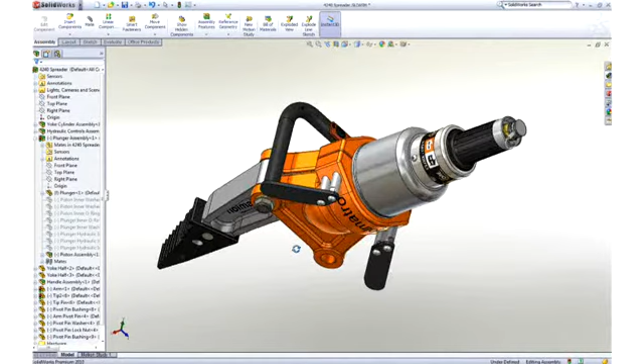This is your first look at SolidWorks. In this brief demonstration, you'll see how Holmatro uses SolidWorks to design best-in-class tools to help rescuers perform their critical life-saving tasks. Looking at this hydraulic spreader, you can see that there's some work to do.

We'll create a part, assemble several parts, and create some drawings. We'll start by designing a new rod end part to connect the piston rod to the spreader arms.

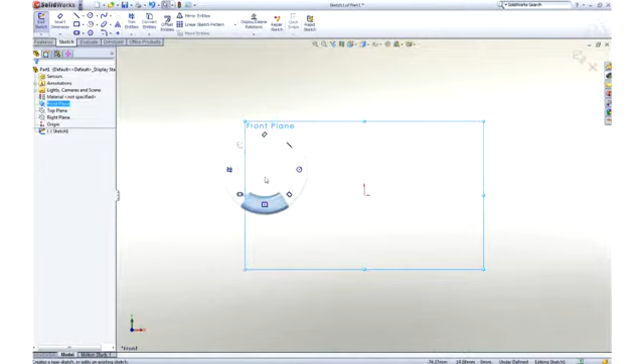The basic building block of a 3D solid model is a sketch, and sketching in SolidWorks is extremely easy and intuitive. Using a mouse gesture, I get access to my most commonly used commands.

Draw a slot, add some dimensions to establish its size, and then drag the center of the slot onto the origin to locate it.

Next, a rectangle is drawn using one of the many sketch tools, and then we will add a couple of circles to hold the link pins.

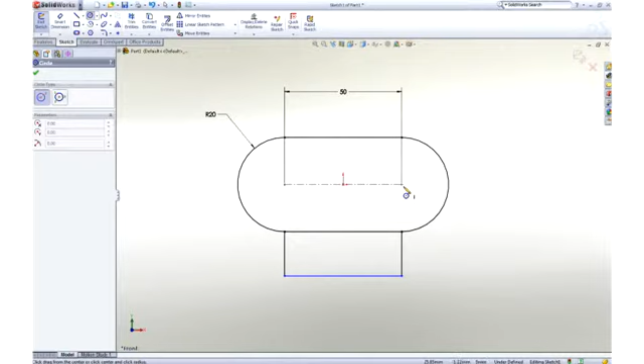The two circles should be the same size, so a quick window selection reveals a pop-up toolbar, and an equal constraint is added to lock their size together.

Notice that as I work, all of the commands and tools are right at my cursor. We call this our heads-up user interface, which is designed to keep your focus on the screen to make you more productive.

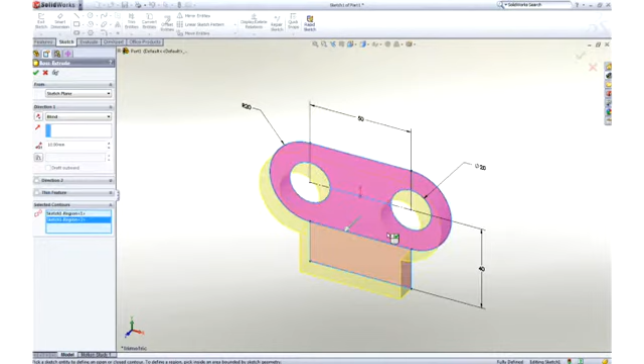Now that this 2D sketch is finished, let's make it 3D by extruding it. It can be extruded in either direction, or in this case we will extrude it 40 millimeters, about the midplane.

To smooth some of the sharp corners, we can add some fillets. Their size can be graphically manipulated on screen, or we can key in a dimension to add some precision.

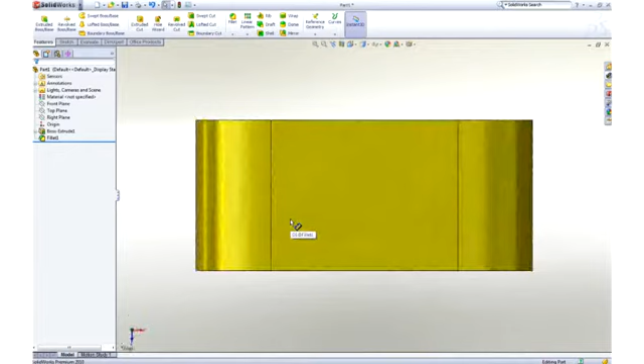Let's add a pocket to the center of the part to accept some links. This time we will use a center point rectangle to capture symmetry while we sketch, and a dimension to control its size.

Using Instant 3D technology, we can add material by dragging the sketch away from the part, or remove material by dragging into the part.

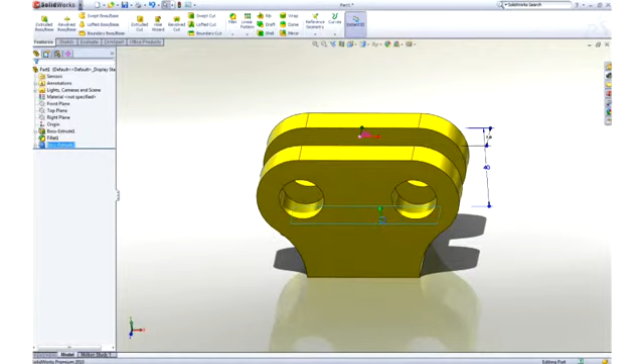The sharp corners at the bottom of the pocket can be rounded by adding another fillet. 2 millimeters would be good.

Finally, we can ease the outside corners with a chamfer. Using the on-screen feature callouts, we can easily control its size while we create it.

Now that you have the hang of it, we will jump ahead a couple features and add a tapped hole at the bottom using the hole wizard.

Gone are the days of looking up hole data, because all of the hole types, standards, and hole sizes are available. Choose the hole parameters, locate it, and SolidWorks takes care of adding all of the proper information to define the hole.

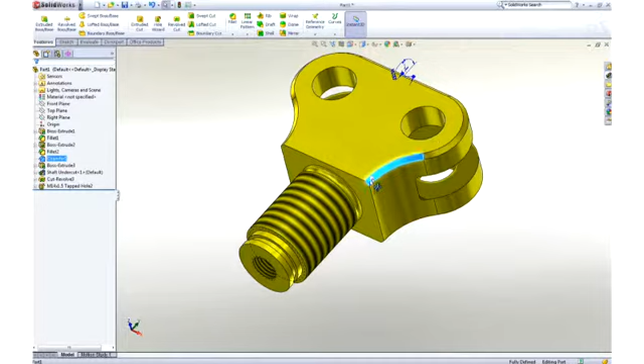Let's leverage our previously created chamfer by dragging and dropping it onto the bottom edge to make a copy. The part looks good, but maybe a couple of changes would help to refine it.

Changing the dimension value changes the geometry, and using Instant 3D technology, dimensions can be dragged and we get real-time feedback of our change. It's important that we fully describe our part beyond just the geometry.

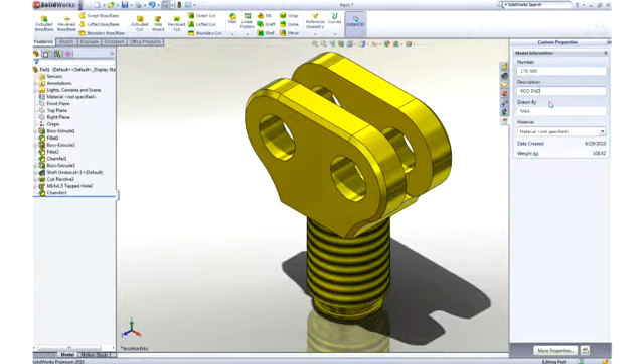Properties such as part number or description can be added and leveraged later in the drawing title block and BOM. Materials can be applied from a list of favorites or from a broad database of materials.

All visual and mechanical properties are applied. Notice that the weight of the part has been updated to reflect the new material.

To document our design, let's create a drawing. SolidWorks displays the default views of the part in the View palette.

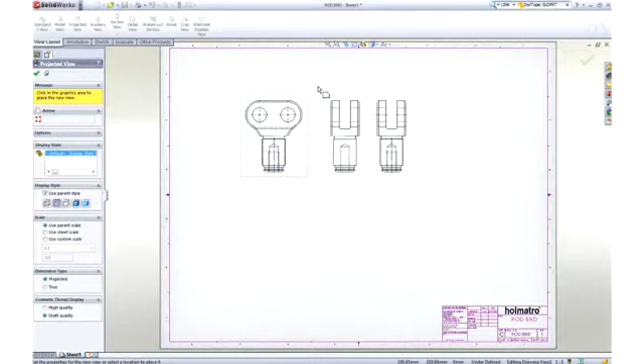We simply drag a view onto the sheet, then we can create any desired projected views, including an isometric. Hidden lines can be removed or views can be displayed as shaded.

For this part, it would be desirable to create a detailed view of the area near the bottom for clarity.

Adding dimensions is simple. All of the dimensions that were used to create the part are available to be placed on the drawing. Since symmetry was used during design, we can add a couple dimensions to locate the round boss at the bottom. The Rapid Dimension Manipulator appears to properly place and space the dimensions at even intervals.

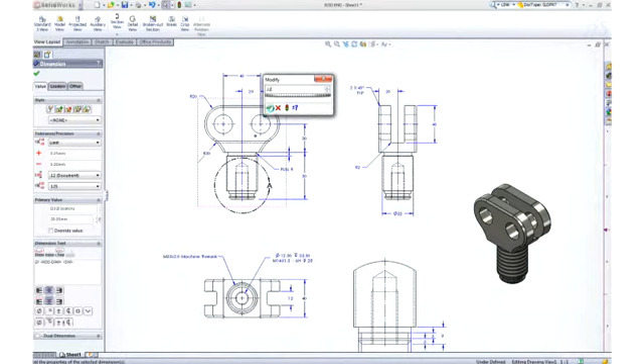Selecting a dimension, we are presented with a dimension palette where we can add more definition, such as tolerancing or formatting. These 20mm holes will not accept the 22mm pins we will be using. No problem—making this change on the drawing updates all the views and changes the part as well.

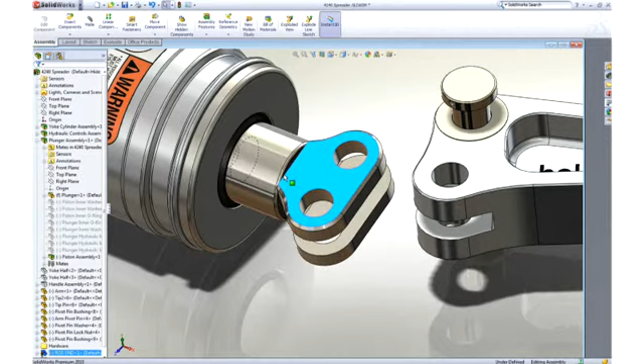Let's move on to some assembly work, and with SolidWorks it couldn't be any easier. For our rod end, simply drag the round boss and drop it onto the cylinder rod. This adds a concentric assembly mate between the parts. To position it along the axis, we can drag the edge of the rod end to the end face of the cylinder rod to add a coincident mate. Next, we will add a link to stop it from rotating.

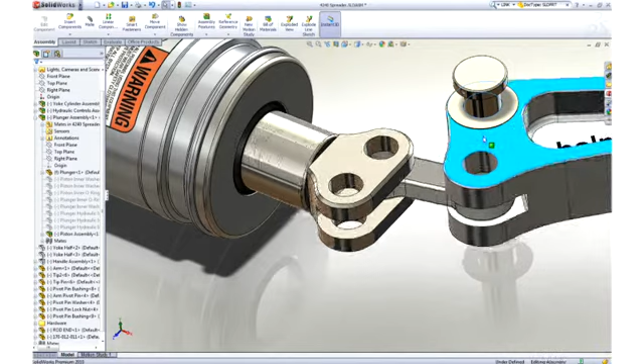To find this part, we enter 'link' in the search assistant. SolidWorks not only returns components with link in their file name, but also digs into the part properties to find the term. As before, we can drag this link from the search pane and drop it on a circular edge of the arm to locate it. Then, using the same drag-to-mate technique, we can hook it to our rod end.

From the same search pane, we can assemble the pin. This pin was modeled for multiple uses and contains many sizes or configurations. We simply choose the diameter and length desired, and SolidWorks builds the part to specification.

Most assemblies contain many hardware items like screws, nuts, washers, and the like. SolidWorks provides a toolbox of such items, containing thousands of parts with millions of configurations for your use. Notice that as we assemble the snap ring, it automatically sizes itself to the shaft on which it's placed.

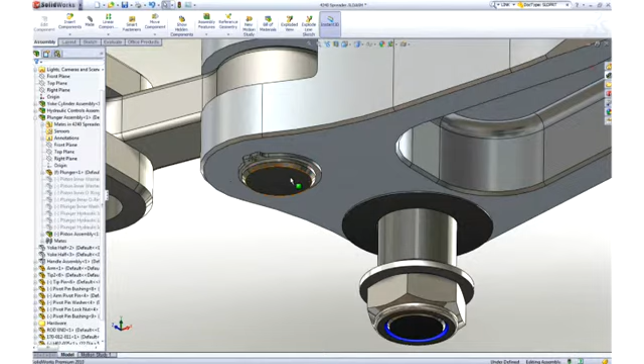SolidWorks allows us to copy parts along with their mates, which is a big time saver. Simply identify the hole and mating face for each hole where the pin is to be placed.

As you can see, these pins are too long for the rod end. Remember, the pin was modeled in multiple sizes, so we can easily change the length of just these two without having to reassemble.

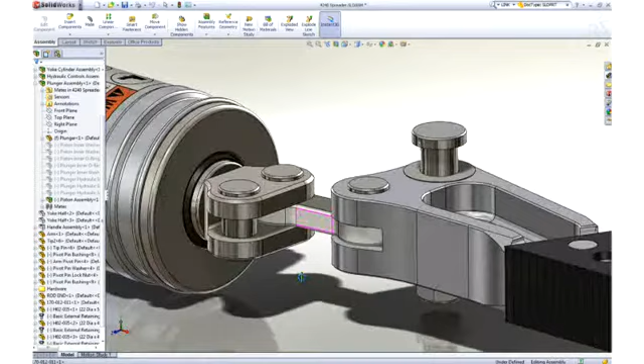Interference detection is an important aspect of 3D design, and SolidWorks takes it a step further with real-time collision detection. Notice that as we move the arm through its range of motion, it interferes with the link. SolidWorks provides both visual and audible feedback of the collision.

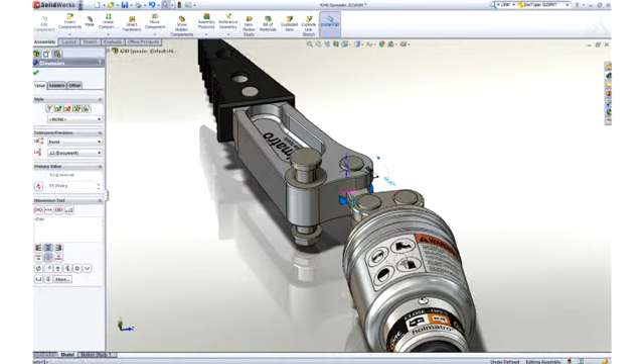A change is in order, and it can be done directly on the part, right here in the assembly, by changing the angle dimension defining the pocket on the arm. Now, as we recheck for collision, we can see we have full range of motion with no interferences.

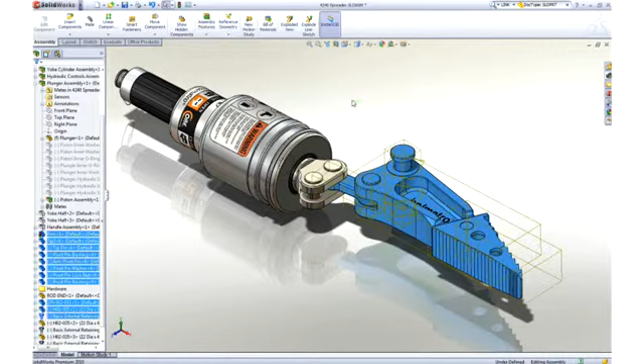Half of the spreader is complete, and we can save assembly time by mirroring the parts about the central plane to the opposite side. SolidWorks allows us to verify and change the position of each part, and even create opposite-hand versions of individual parts.

In just two minutes, there were 19 parts added to this assembly, and our assembly task is complete. Let's turn on the parts we previously hidden and document this assembly.

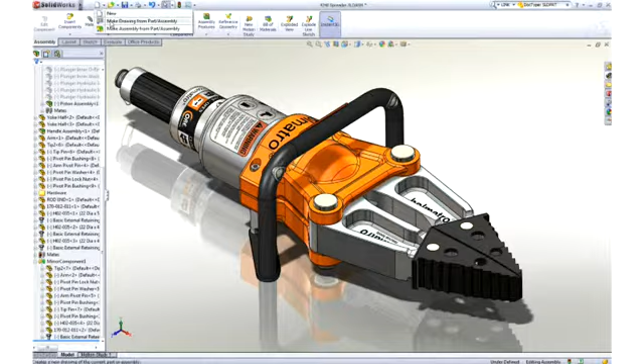We'll wrap up the demonstration by creating an assembly drawing. As we did when creating the part drawing, we can drag the required views onto the sheet. To better describe this spreader, we will use an exploded view of the assembly.

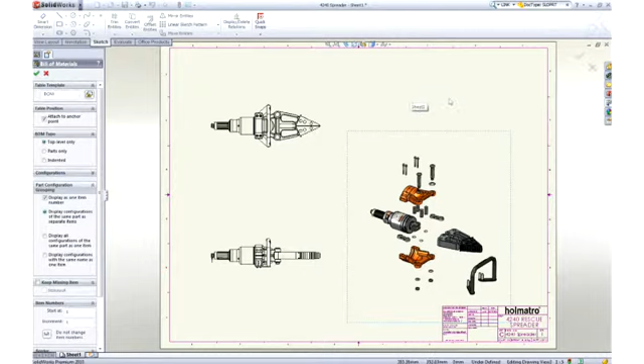No assembly drawing is complete without a bill of material. SolidWorks itemizes the parts, extracts information like description, and adds the appropriate quantities. No bill of material is complete without balloons, and they can be added automatically.

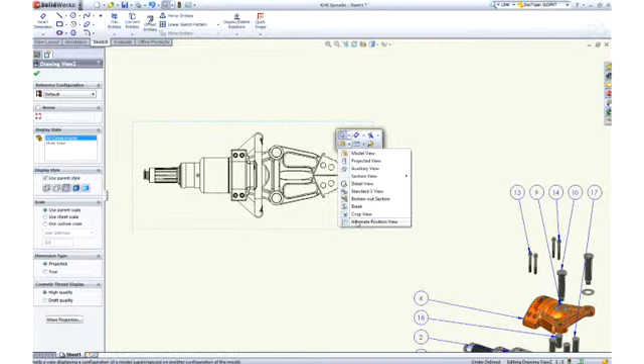To depict the motion of the spreader assembly on a 2D drawing, we can add an alternate position view to describe the assembly in both the open and closed positions. Add a couple of reference dimensions, and our assembly drawing is complete.

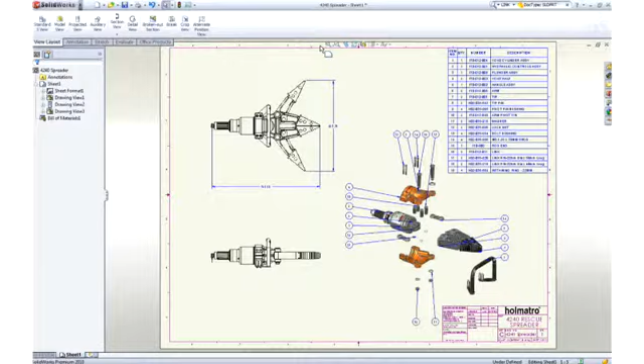We strive to deliver simple but effective tools to help you design better products faster. When you have an idea for a great product, SolidWorks provides the tools to design it in less time and at lower cost. This has been your first look at SolidWorks. To learn more, contact your local SolidWorks reseller or explore our website for more information.